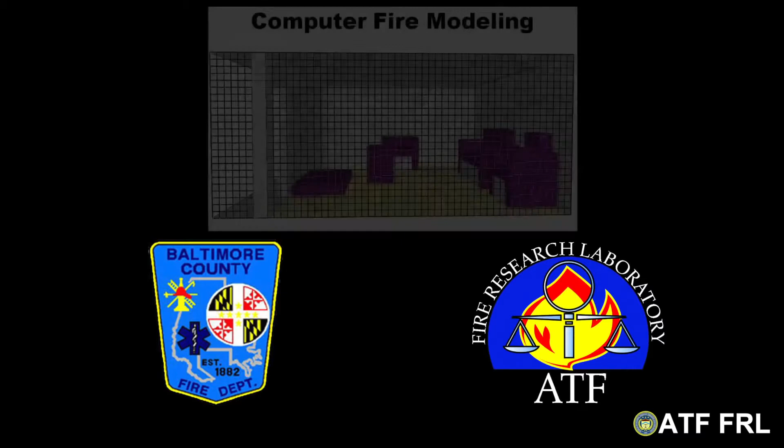Fire Dynamics Simulator, FDS, works by dividing a space or room into cubical grid cells for calculation purposes. FDS then computes various computational fluid dynamic calculations for each grid cell to predict the movement of mass, energy, momentum, and species throughout a three-dimensional space. The Dowling Circle model consisted of 2,560,000 total grid cells that were each 10 centimeter cubes.

The model was used to simulate a total elapsed real time of 27.5 minutes, beginning before the 911 call and ending just after flashover of the third floor and the firefighter Mayday. The model was synchronized real time with the fireground audio throughout the duration of the fire.

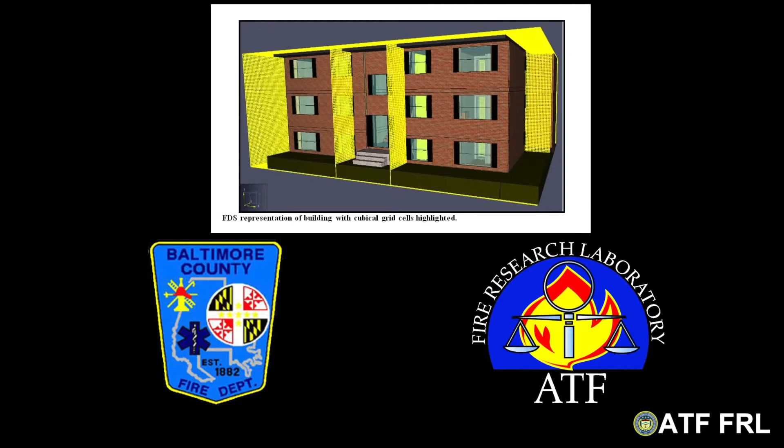While no fire model will exactly replicate a fire, the following model provides insight on the route of fire spread, the rapid fire growth on the second and third levels, and the benefits of compartmentation on slowing fire spread. This video summary is intended to be used as an educational tool that provides insight on potential methods for preventing similar tragedies in the future.

Please reference the printed ATF Fire Research Laboratory Engineering Report dated December 27, 2011 for details regarding the Fire Dynamics Simulator model and the complete engineering analysis of this incident.

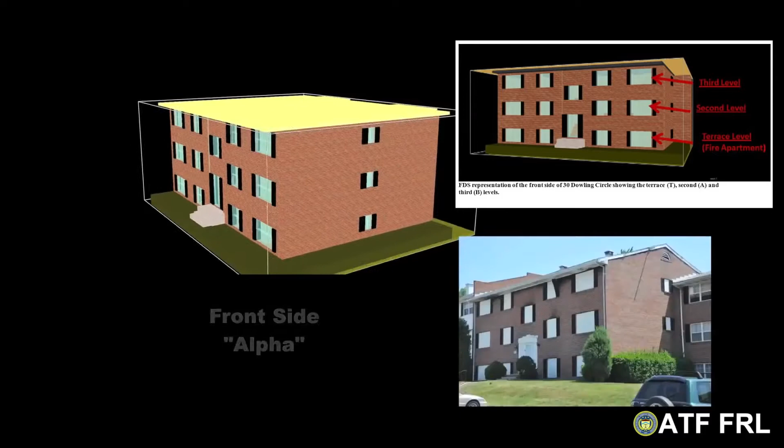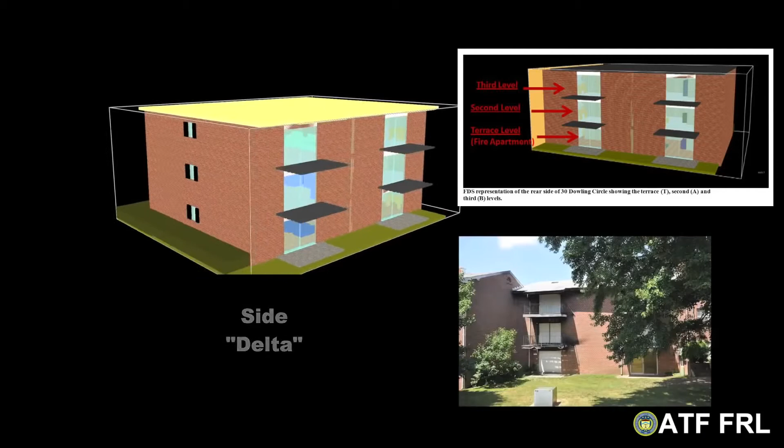30 Dowling Circle is located approximately 1 mile from the First Dispatch Engine Company. The building consists of a 3-story garden apartment complex with brick construction and a truss-supported roof. The building has 3 levels with a ground level labeled the terrace floor, middle level labeled the second floor, and the top level labeled the third floor.

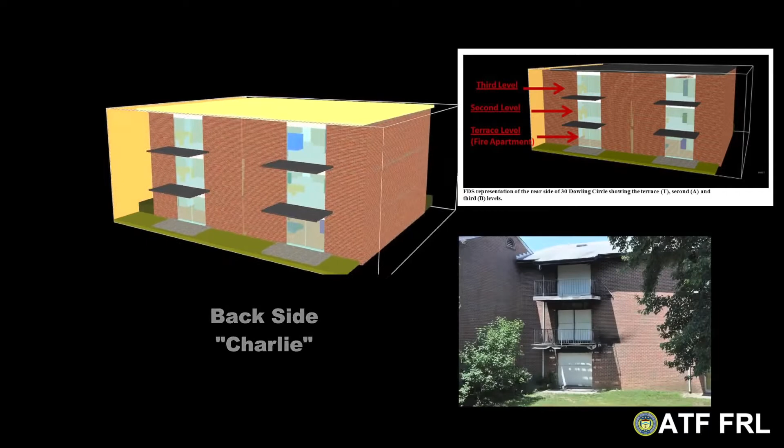The fire building contained a total of 6 apartments divided by a common enclosed stairwell in the center, with 1 apartment to the left and 1 to the right of the stairs. The address side of the building was labeled the Alpha side, with Bravo, Charlie, and Delta designating the other 3 sides in a clockwise fashion. Entry is gained through the front split-level stairwell by a common entrance door with individual doors leading to each apartment.

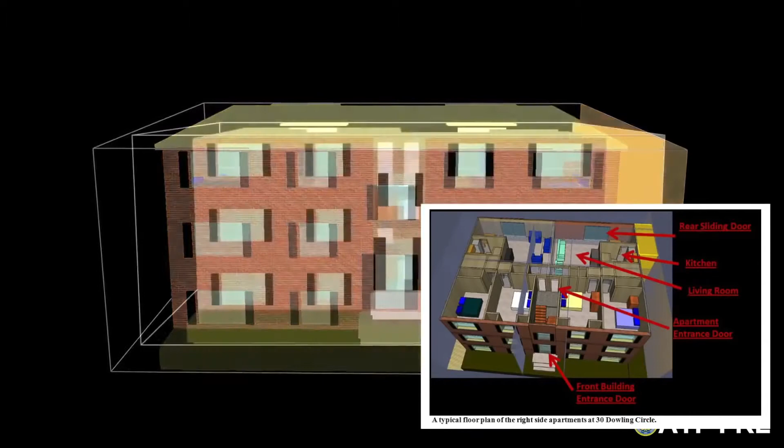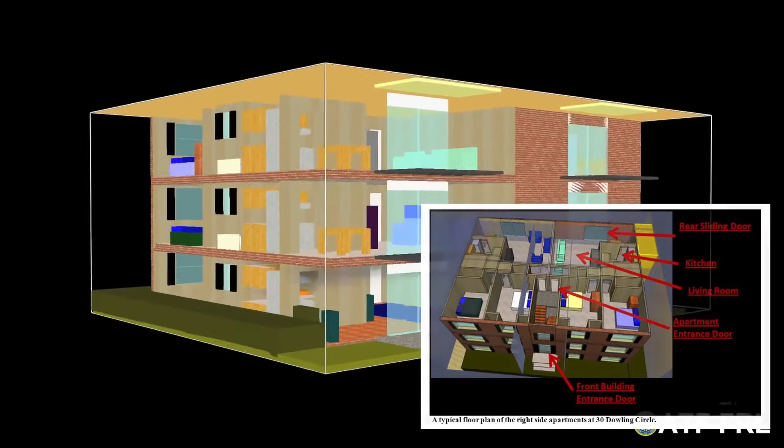Each apartment consists of 2 bedrooms, a kitchen, a bathroom, and a living and dining area. There are sliding doors leading to either a wood joist balcony on the second and third floors or a concrete patio for the terrace level apartments. The garden apartment building was attached to 2 similar garden apartment buildings, 1 on each side. The fire damage was isolated to 30 Dowling Circle, so the exposure buildings were not included in the computer fire model.

The fire originated on the stovetop in apartment T2 on the terrace level, when the occupant left frying oil unattended on the stove.

Baltimore County 911, what's the address of the emergency? 30 Dowling Circle, apartment T2 with the fire. Okay, I'm going to help. I'm going to get some information, and that was 30. Ma'am, 30 Dowling Circle? Yes. Okay, is that off of Deanwood Road? Yes. What apartment are you in? T2. I'm sorry, T2? Okay. What was on fire, ma'am? Ma'am, what's on fire? Ma'am, what's on fire? What is on fire? The kitchen.

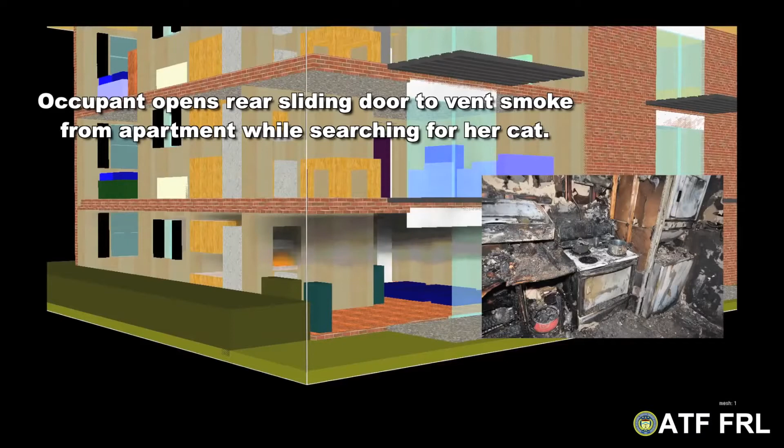The kitchen? What in the kitchen is on fire? Ma'am, what inside the kitchen is on fire? What is on fire in your kitchen? What part of the kitchen? Oh my God. Is it the stove or the table or kitchen stove? Okay. All right. Are you able to turn off the power and close the door? Ma'am, are you able to turn off the power and close the door? No, it's too much fire. It's much higher. What is your name?

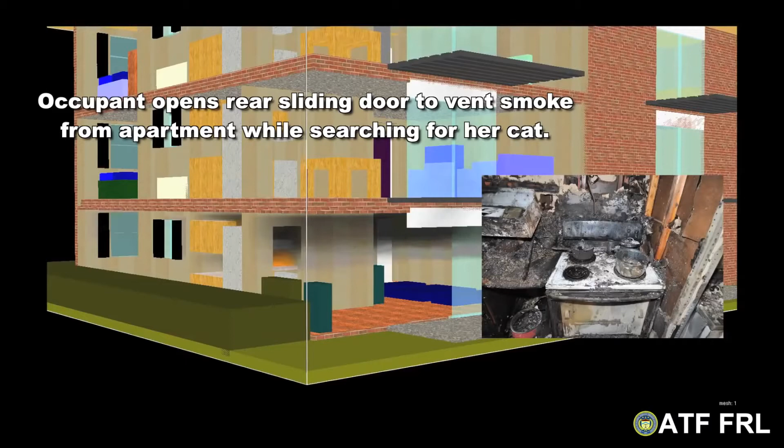Okay, I got help coming out there, okay? All right, I want everybody to evacuate to a safe place. Is anybody injured? I can't find my cat. All right, I need you to get out of the apartment, okay? All right, anything does change or worsen, you call us back immediately. Okay. Thank you. You're welcome.

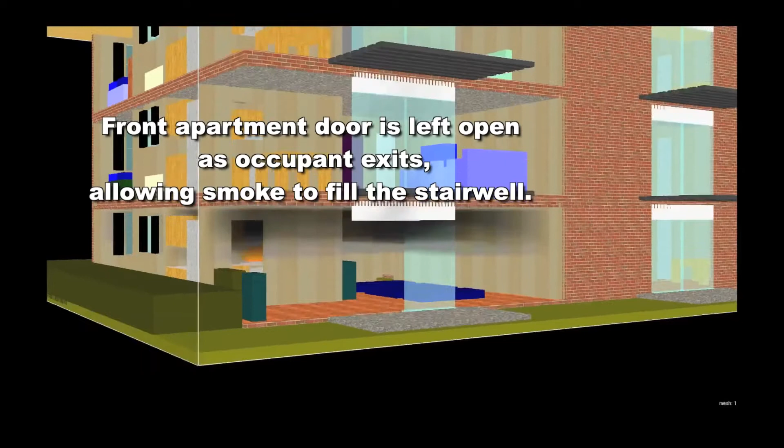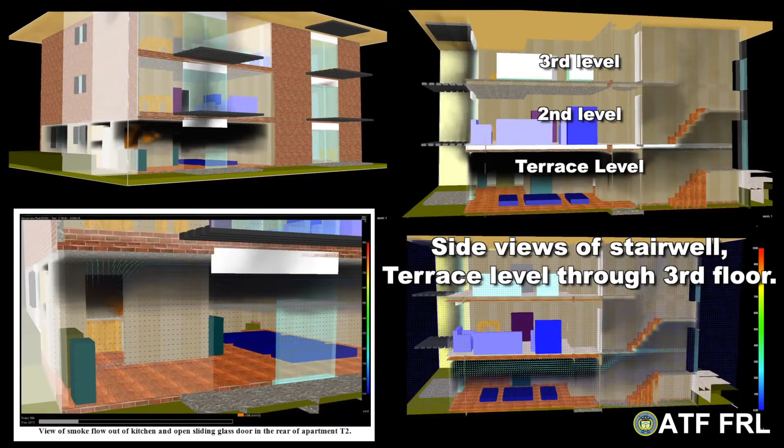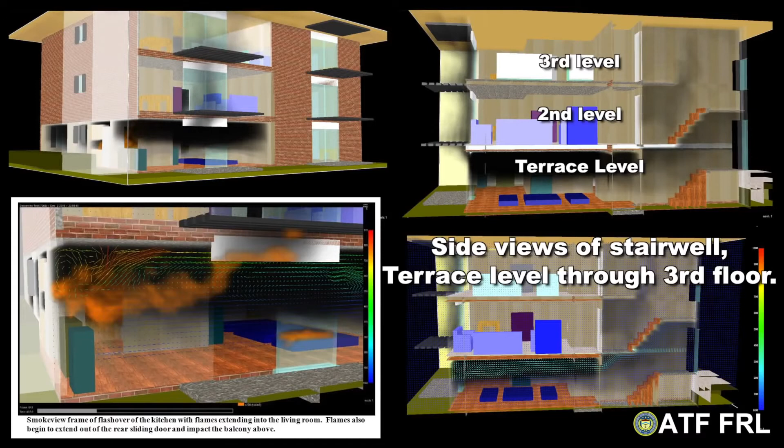The flames from the kitchen ignited combustibles in the adjacent living and dining rooms. With both the rear slider and the front door open, there was sufficient ventilation to allow the T2 apartment to eventually become fully involved. The open front entrance door to the T2 apartment allowed heated gases and smoke to enter the foyer area and the stairwell, making it untenable and blocking the primary means of egress for the occupants above the fire. Flames also extended out of the rear slider and ignited both the second and third level wooden balconies above.

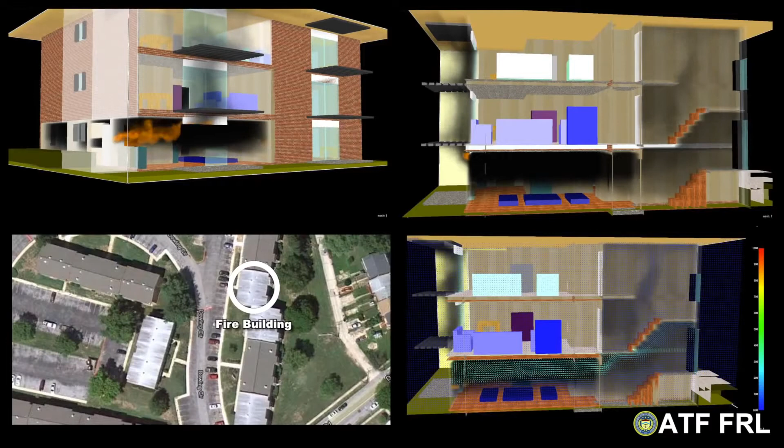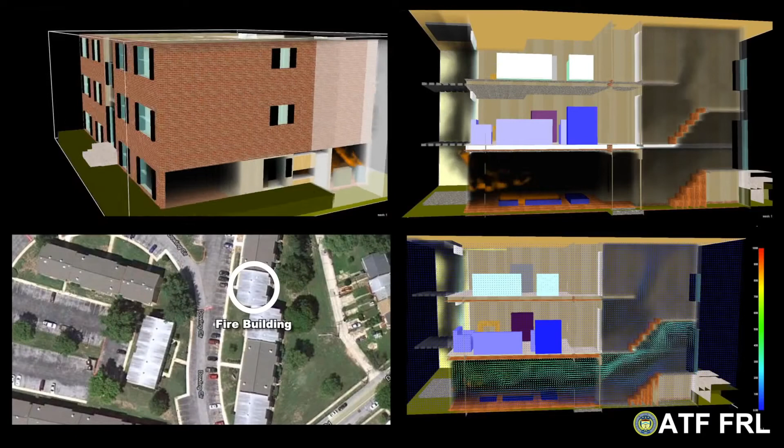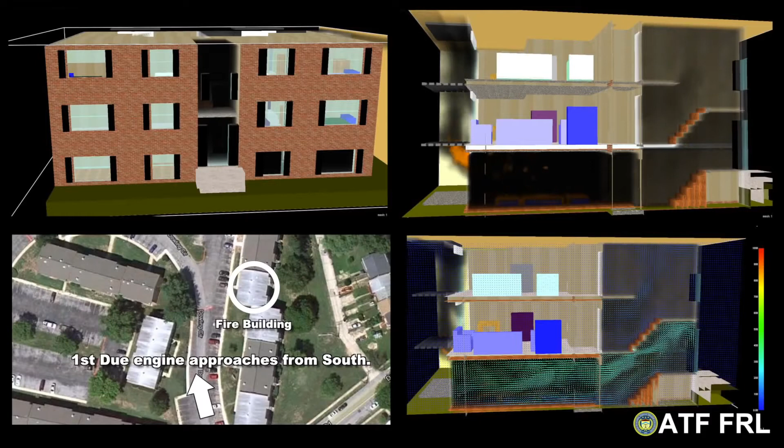10-11 en route. 10-11, 89. Engine Truck 1 en route. 10-11 route. Engine 1, Truck 1, Engine 11, 89. Get your lights. Engine 11 arrived. We got a 3-story brick garden apartment. We got smoke showing. Captain Miller off Engine 11 be command, have the next engine in grab the hydrant right at Deanwood and Dowling. Engine 11, 1821. All units from command, at this time we're going to be doing an aggressive interior attack with an inch and 3/4 line.

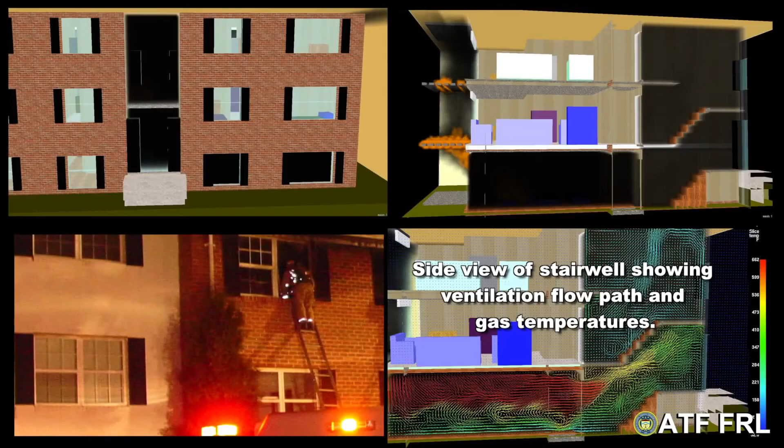Engine 291, response check, 1821. 292, you calling your route? Yes, with 3. 297, route with 3, 1822. Dispatch from command, I'm going limited command, we have rescue. Okay, Engine 11, 1823. 307 route. Engine 307, 1823. Squad 332. Engine 10's arrived, we're laying in from the hydrant. Engine 10, 1823. Squad 303 en route. Squad 303, 1824. 911, your message. Thanks, just a fire rescue box already in progress, 911, 1823. Truck 1's arrived. Truck 1. Engine 8's around. Engine 8, 1825. Medic 11, heavy en route, 1825.

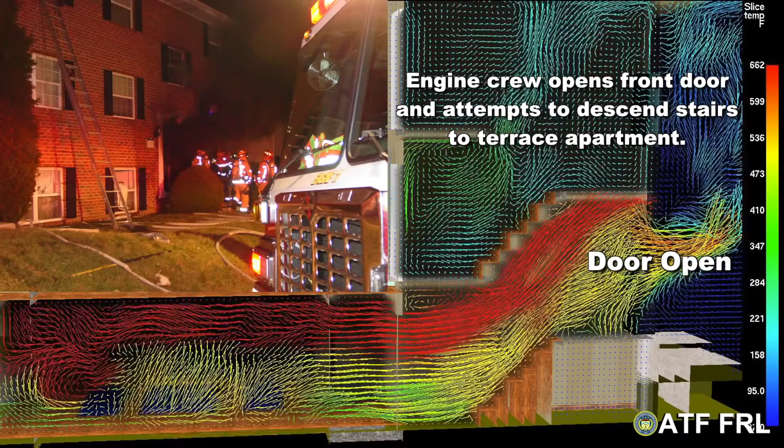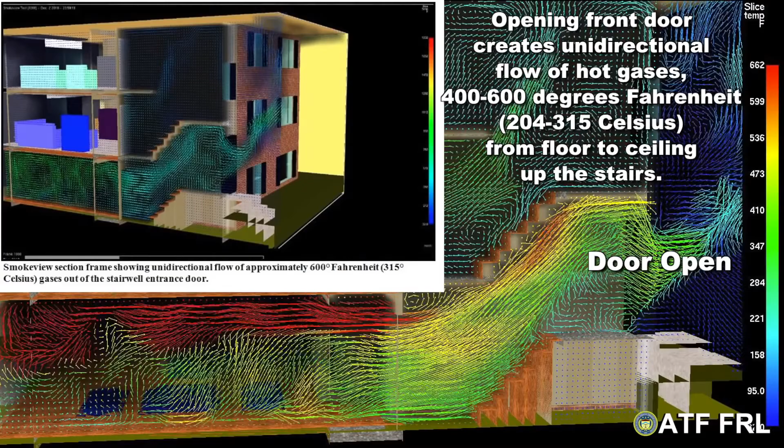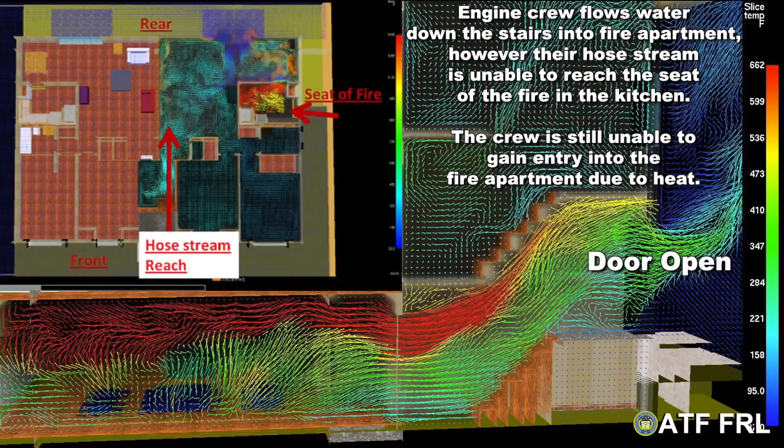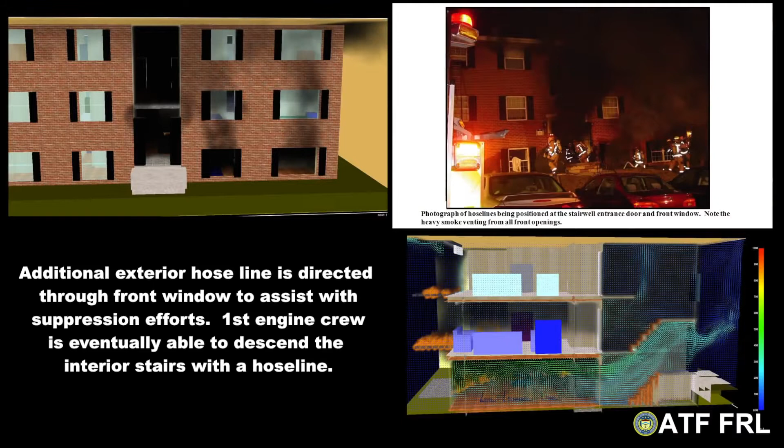Engine 1's around behind. Engine 1, you're advising you arrived on the hydrant. Correct. Around. One's okay, we're short. Engine 1 from command, you think you can get a crew around back to side Charlie? There's no access from this side. Engine 1's okay, we'll take side Charlie. Engine 8, your message. Engine 8 around on 1-2. I have you en route 1826. EMS 1's en route from the Beltway and C1's en route. EMS 1, I have you en route 1826. Engine 11, water coming. Dispatch from command. Repeat, you're unreadable. Command, give me a second alarm. Command requesting second alarm, 1827. Command to the next engine in, go past Dowling Drive and go to the alley to side Charlie of the apartment. You have access from side Charlie.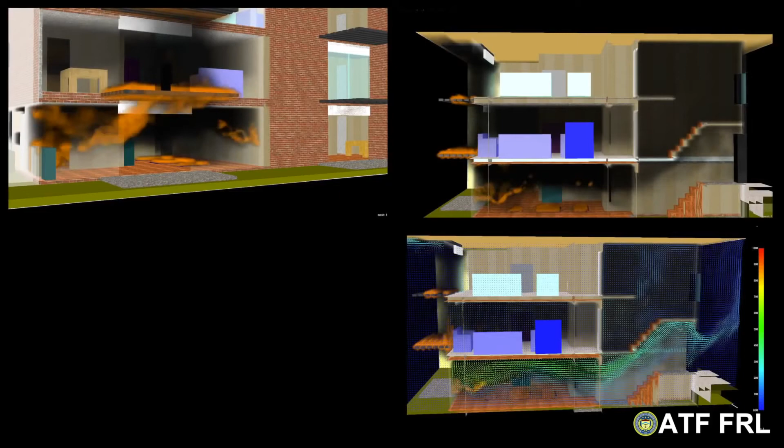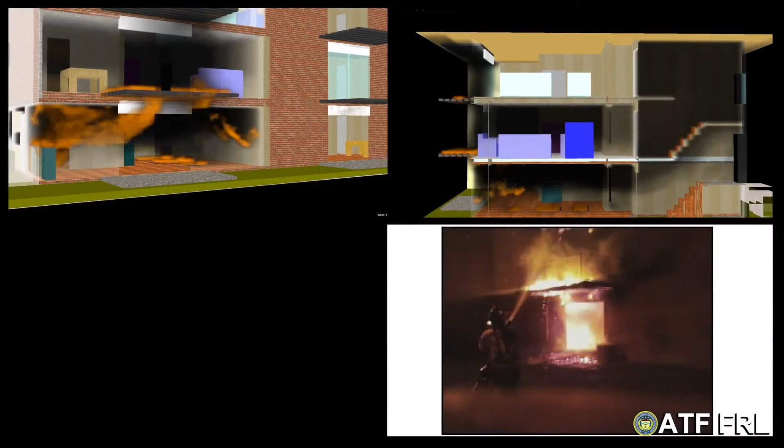Truck 8's on side Charlie, arrived. 292 has arrived. We're doing a split lay from the alley and Deanwood. Complete my lay. Water pressure, you want me to charge it? 292, I have you arrived. Truck 8, I have you arrived. And 55, I have you en route 1830. 307's arrived as well. EMS 1, I have you arrived. I'm still en route. I just want you to know I put EMS 6 on this call, so he may be a little bit closer to get there before I can. Okay, so EMS 1, are you still responding? Yes, sir. Okay, 1831. Squad 303, right? Squad 303, 1831.

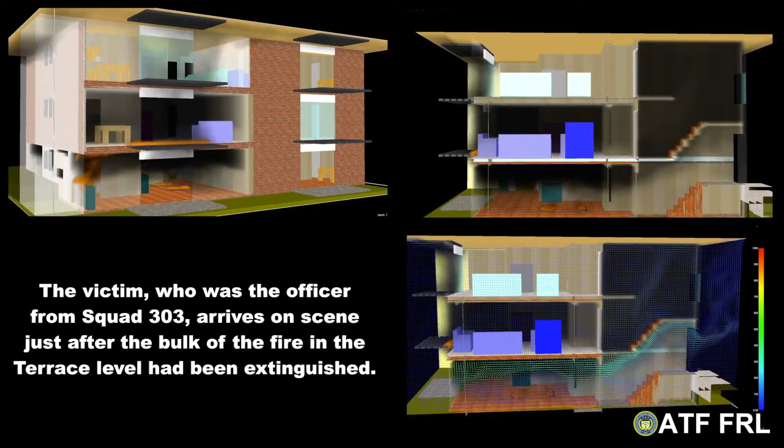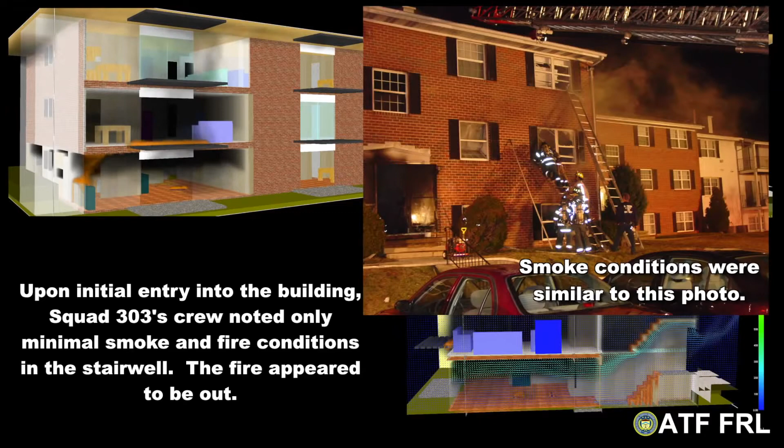Has arrived. We got 292's line. We're going to reverse lay to the hydrant. Engine 1 to Engine 11, how's your water pressure? Dispatch from command, how deep do you need gas en route? That's right, 1832. We need more pressure on our second line at the window.

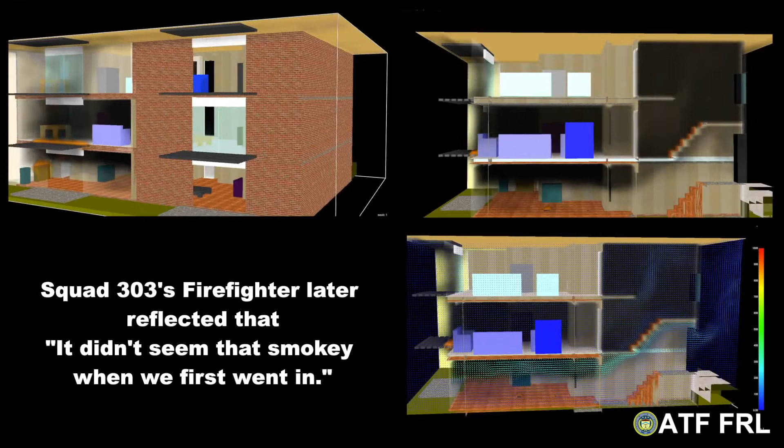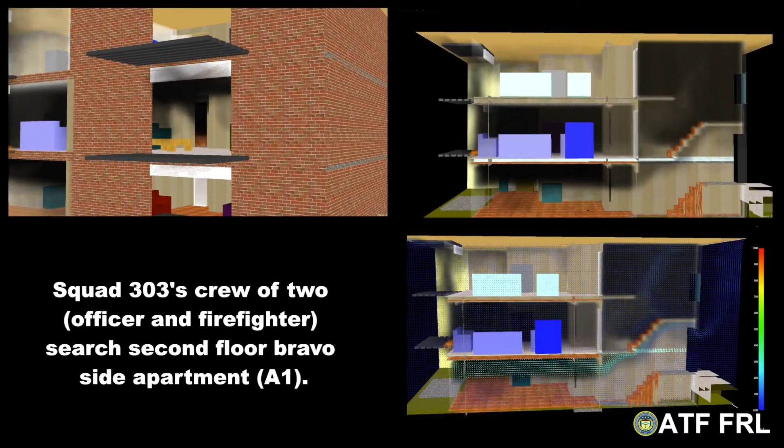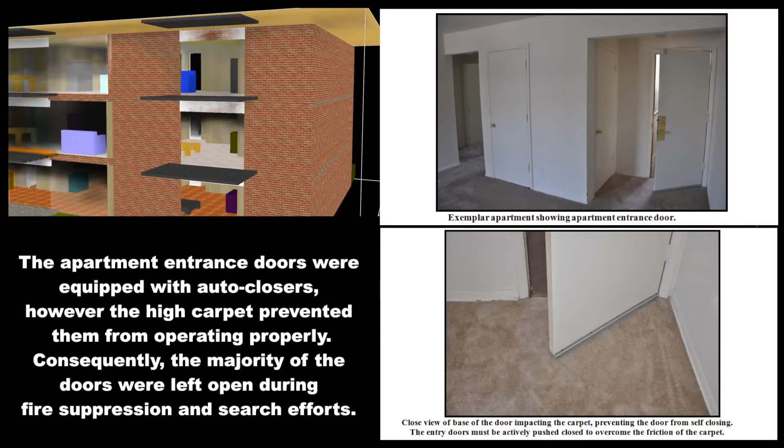Command from dispatch. Command from dispatch. Command, BGE has a 30-minute or less ETA. Dispatch, relay that message. Copy. Right, one ground. Let one have you en route. Engine 8, repeat your message, multiple units. I'll relay your message to BG&E to command. Okay, thanks, Engine 8. Dispatch from command, officer of 292 is going to be Division Charlie. Sorry, Command. Officer 292 is Division Charlie.

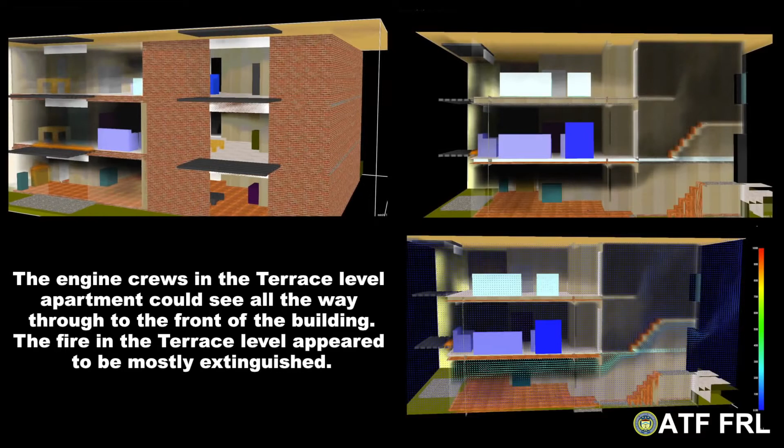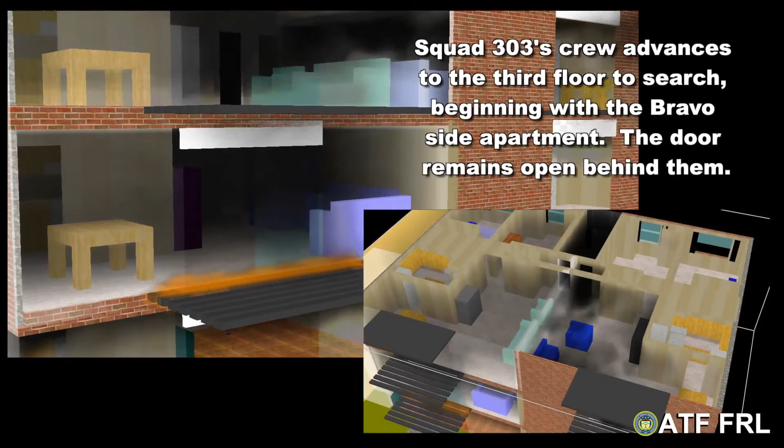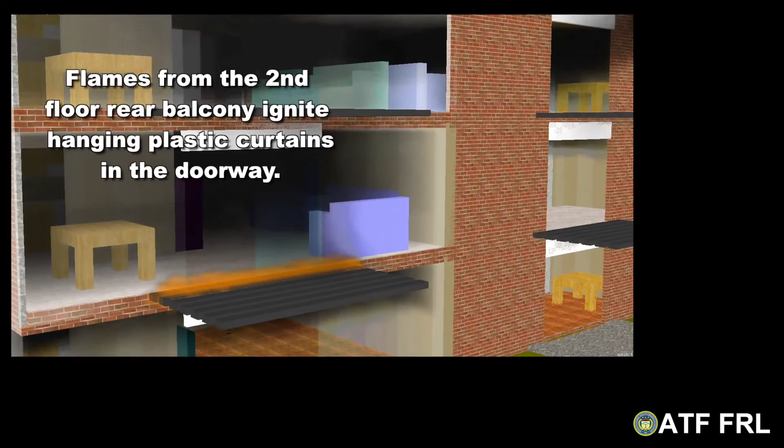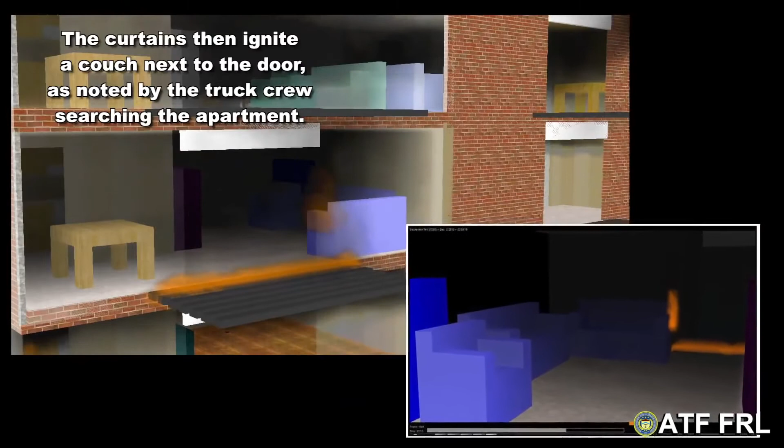Engine 8 arrives. Command for Engine 8, we're on side Charlie with Truck 8 and 292. Received, Engine 8 on side Charlie. You got a Charlie sector set up? That's correct. The lieutenant from 292 is Charlie. Okay. Dispatch from command, could you give me a second medic unit? Command, you have Medic 11, EMS 1 is also en route. Medic 1, Medic 55 are all en route or on scene. Received. Command to Truck 1, urgent. Go ahead, Truck 1. Second floor, we're bringing somebody out the window. We need help on the ladder.

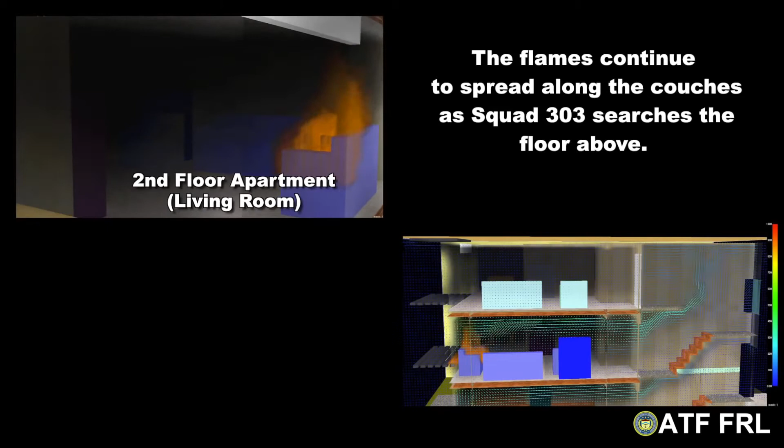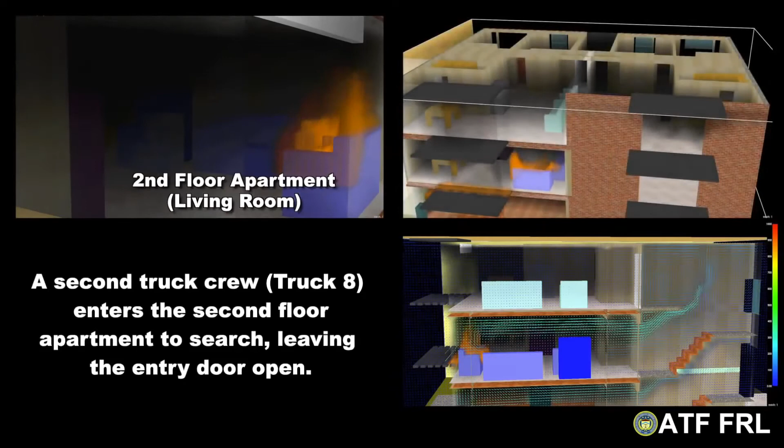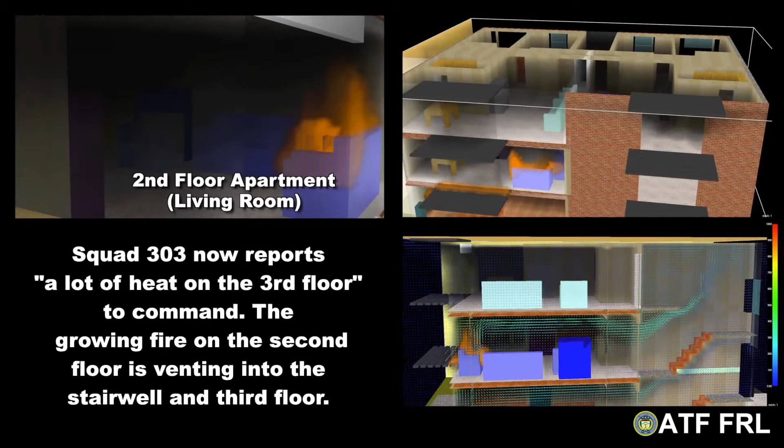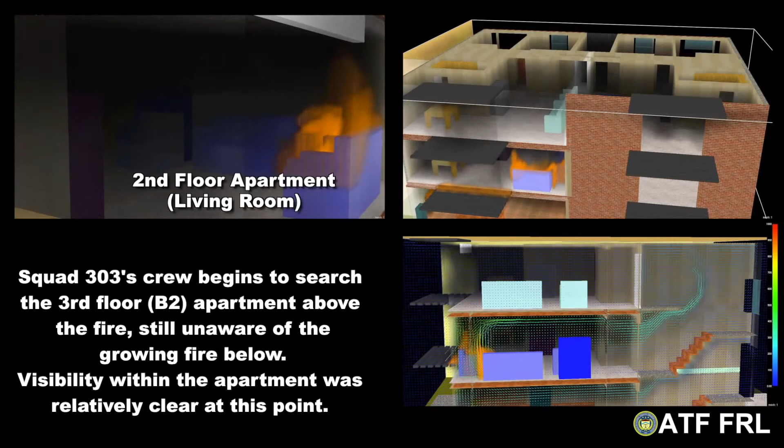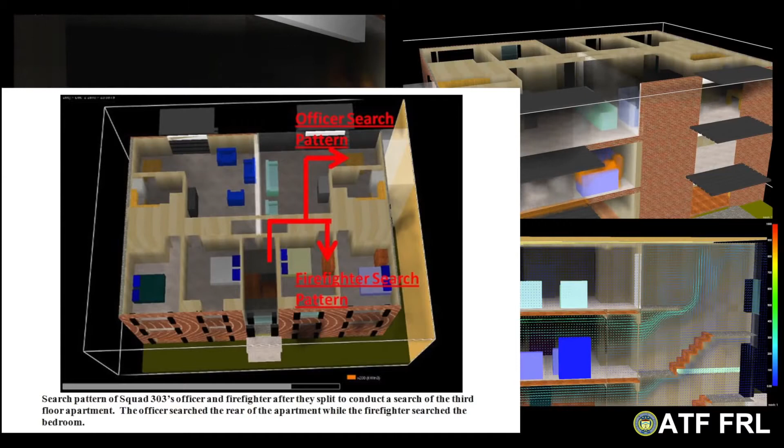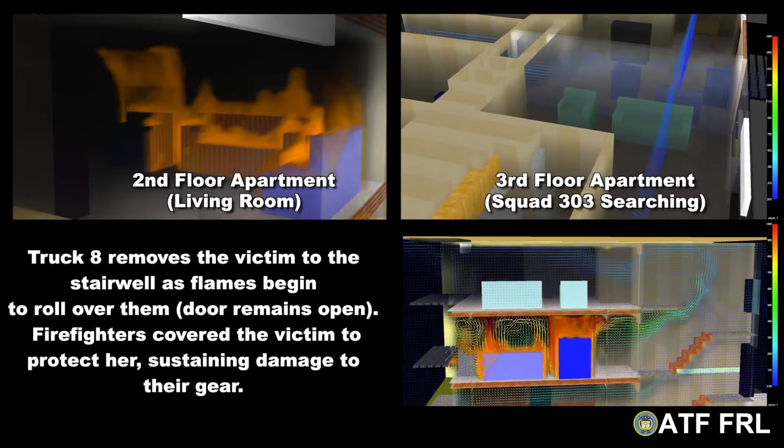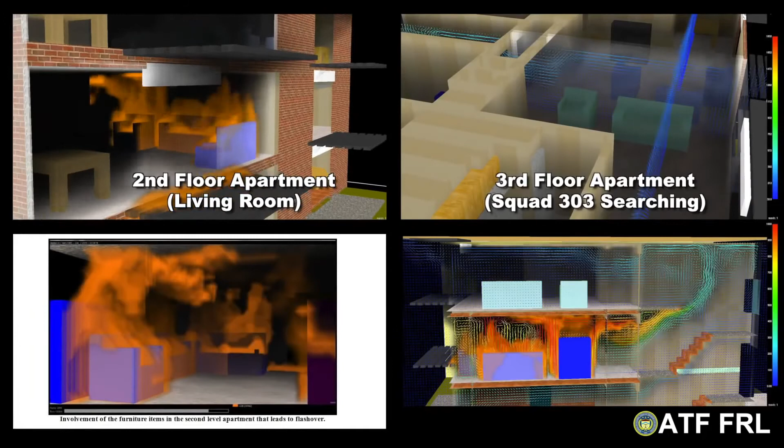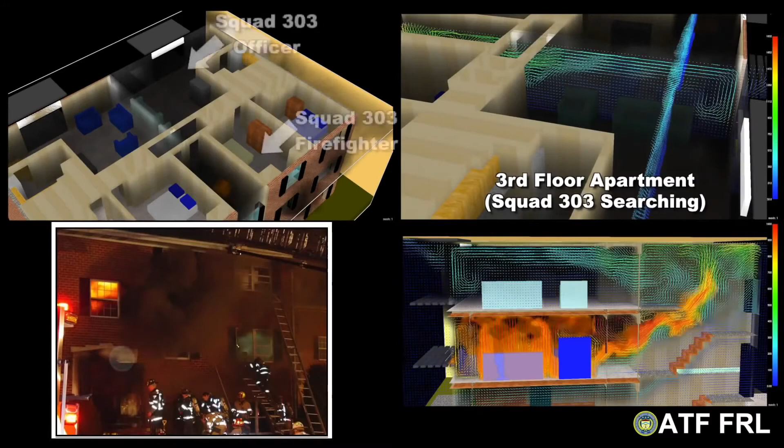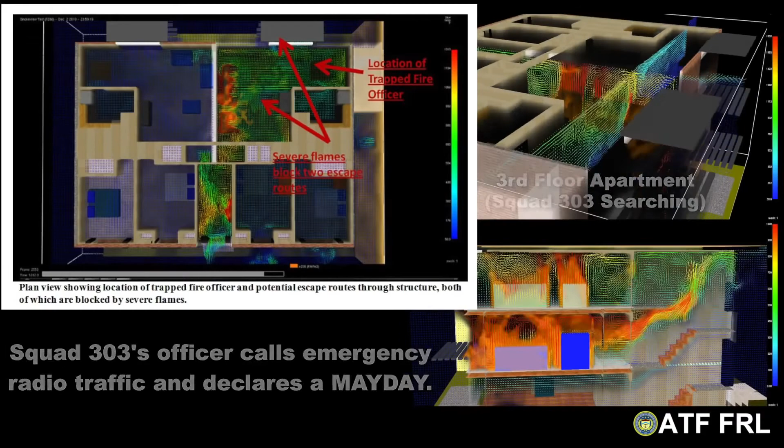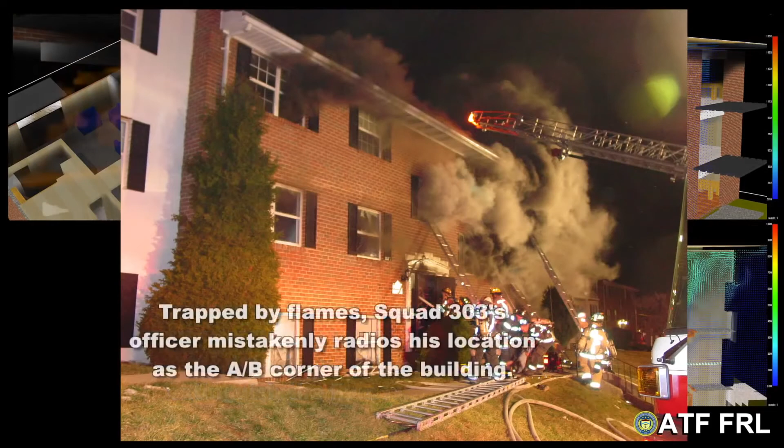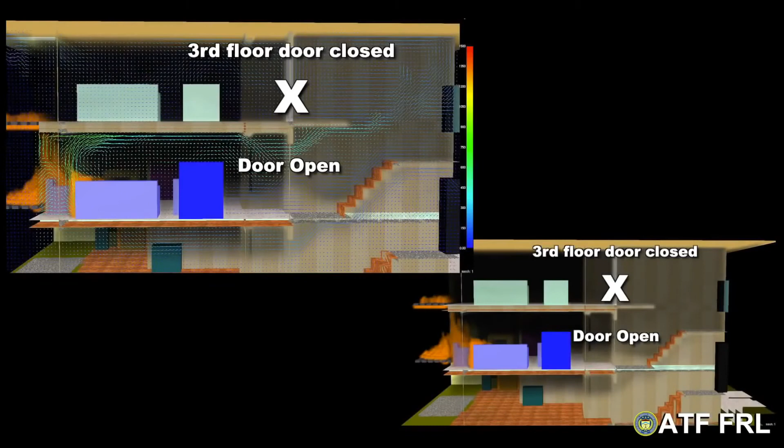The first alternative model run features the exact same input conditions as the actual model, except the third floor door is shut after opening. The second floor door remains open. The apartment entry doors from the stairwell were fire-rated doors constructed of solid wood. As soon as the door is shut, the ventilation flow path from the stairwell into the apartment is blocked.

With the third floor apartment door closed, the outlet of the ventilation flow path was blocked at the top of the stairs. Without a complete flow path, there wasn't sufficient oxygen flowing through the second floor apartment to support extended burning in the stairwell. Consequently, after flashover of the second floor, the flames in the stairwell only exist momentarily before consuming all available oxygen and becoming ventilation limited.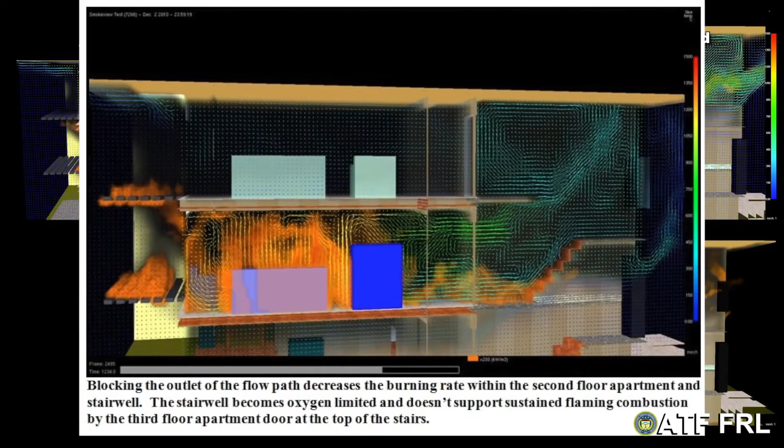Blocking the outlet of the flow path decreases the burning rate within the second floor apartment and stairwell. The stairwell becomes oxygen limited and doesn't support sustained flaming combustion by the third floor apartment door at the top of the stairs. Even with the front stairwell window vented, the upper volume of the stairwell near the third level apartment entry doors remains oxygen limited, and the flames do not extend to the third level apartments via the stairwell.

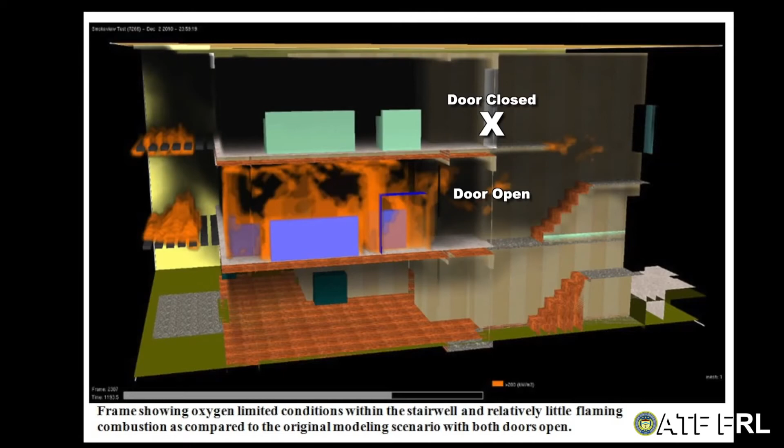This is an FDS frame showing the oxygen limited conditions within the stairwell by the third level apartment doors. Note the relatively little flaming combustion as compared to the actual modeling scenario with both third level apartment doors open. For comparison purposes, this is an FDS frame of the actual model with both doors open at the same point in time as the previous image. Note the increased burning rate as compared to the ventilation limited conditions within the stairwell with the third floor apartment door shut, as shown previously.

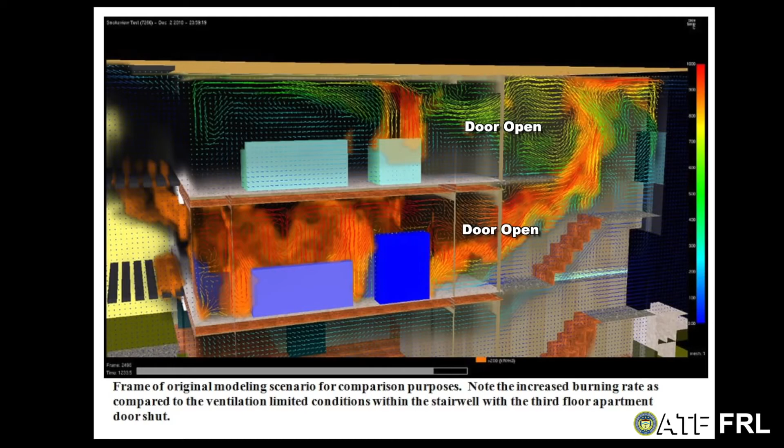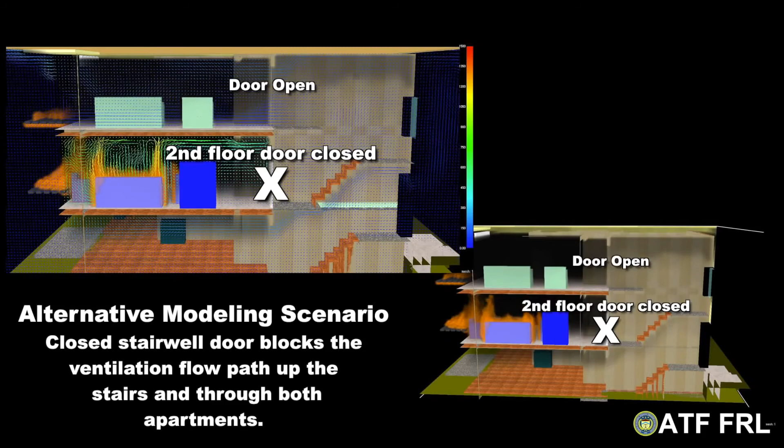The second alternative model run features the same input fire as the actual model, except the second floor door is shut after entering and leaving the apartment. The third floor door remains open. The model indicates that closing the second level apartment door prevents the flow of smoke, heat, and other products of combustion from entering the stairwell, thus preventing flashover of the stairwell and the third level. As long as the second floor entry door remains shut, the model indicates that conditions within the stairwell and the third floor remain tenable for firefighters, even if the third floor apartment entry door remains open.

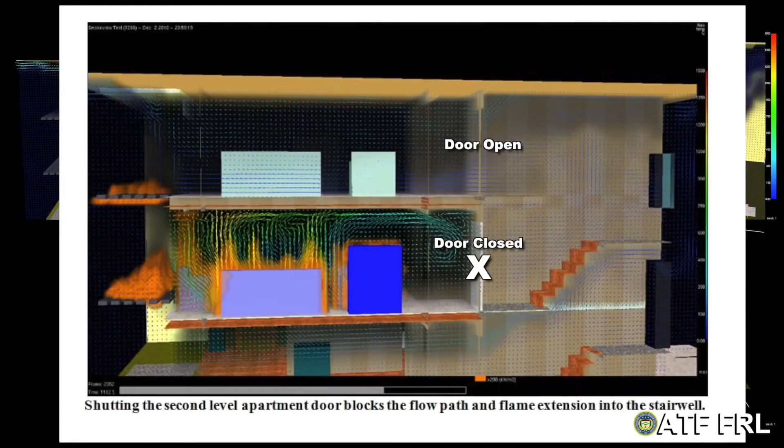Shutting the second-level apartment door blocks the ventilation flow path and flame extension into the stairwell. Even with the third-floor apartment door left open, the model indicates that the stairwell and the third floor remain tenable for firefighters. Flames will eventually extend from the third-floor balcony into the apartment. However, the escape routes through the stairwell and the front apartment windows are accessible.

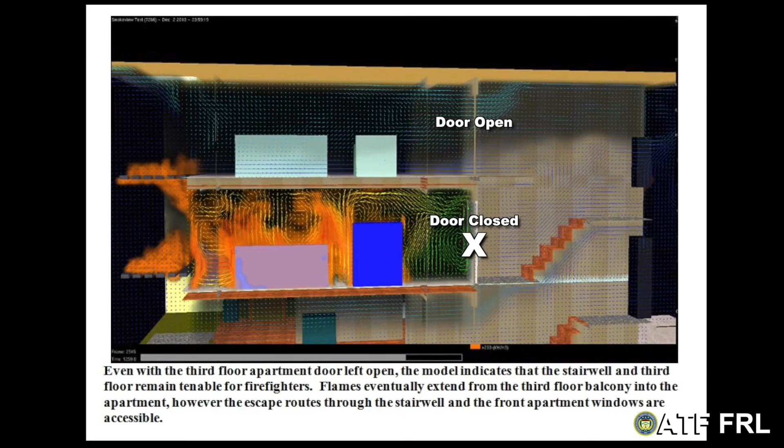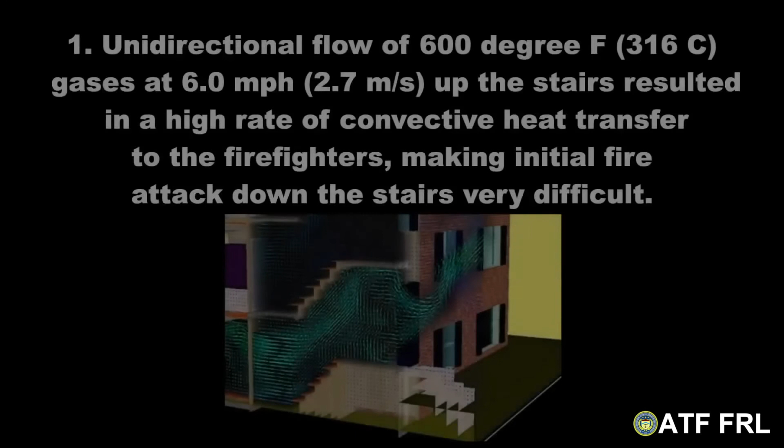Conclusion 1. The unidirectional flow of 600 degree Fahrenheit gases in excess of 6 miles an hour up the stairs resulted in a high rate of convective heat transfer to the firefighters, making initial fire attack down the stairs very difficult. Conclusion 2. The open apartment entry doors allowed the main stairwell to act as an open channel for fire and smoke spread between the second and third levels, resulting in flashover of the third level approximately 30 seconds after the second level.

Conclusion 3. The model supported the scene observations and indicated that shutting the apartment entrance doors blocked the flow of buoyancy-driven fire gases, ultimately preventing fire extension to the third level apartment via the stairwell. The conclusions from this analysis are intended to be reviewed by the post-incident analysis team to assist in the formation of recommendations to mitigate the danger associated with future fire incidents.